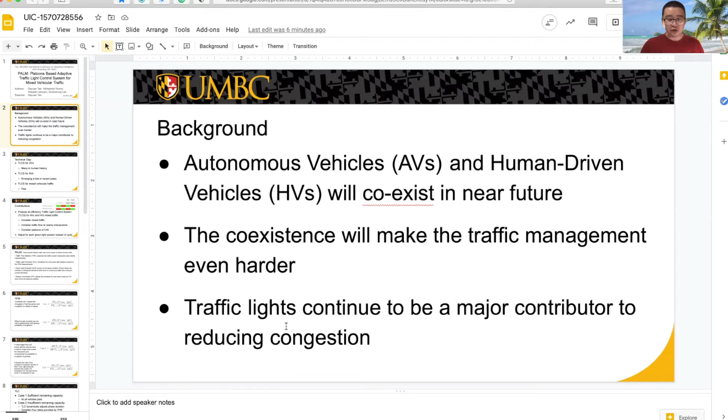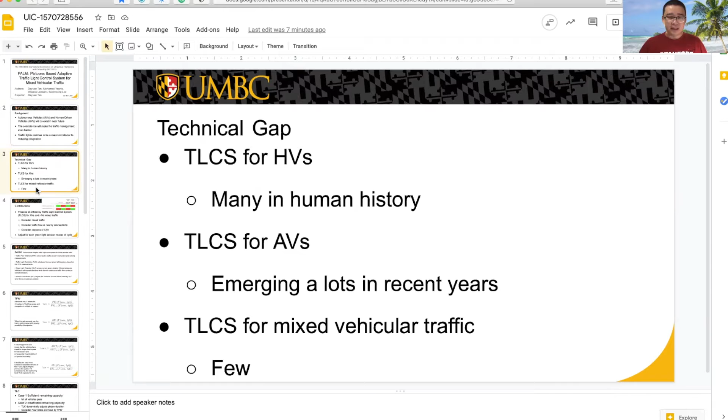Today, there are many traffic light control systems for human-driven vehicles. We deal with them every day. Meanwhile, in recent years, there are many newly proposed traffic light control systems, especially for autonomous vehicles. But how about traffic light control systems for mixed vehicular traffic? The number is few. That's the problem we want to solve in this paper.

So in this paper, we propose an efficient traffic light control system for AVs and HVs mixed traffic. We consider the mixed traffic, of course, and we consider the traffic flow not only at the current intersection, but also at nearby intersections, which can help us better understand the traffic flow, the global situation. In addition, we also consider the platoons of autonomous vehicles, especially connected autonomous vehicles.

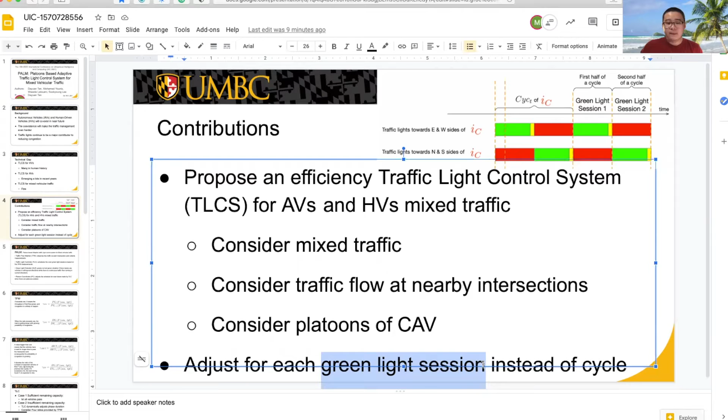What's more, we also propose the concept of green light session, which is a new concept. We adjust our traffic light schedule based on green light sessions instead of cycles, which is what researchers usually do. So we have one figure to help us understand green light session. The top one shows the traffic lights towards the east and west side of the intersection center. And the bottom one shows the traffic lights towards the north and south side of the intersection center.

And we call this one cycle. And this will be the second cycle. Usually what researchers do is at the end of the first cycle, they calculate, predict, and schedule their plan for the next cycle. But here, we don't do this. We propose the concept of green light session.

We call this the first green light session. It's actually the first half of a cycle. It includes the green light phase for the east and the west side. And we call this the second green light session, which is actually the second half of the cycle. It includes the green light duration for the north and south side.

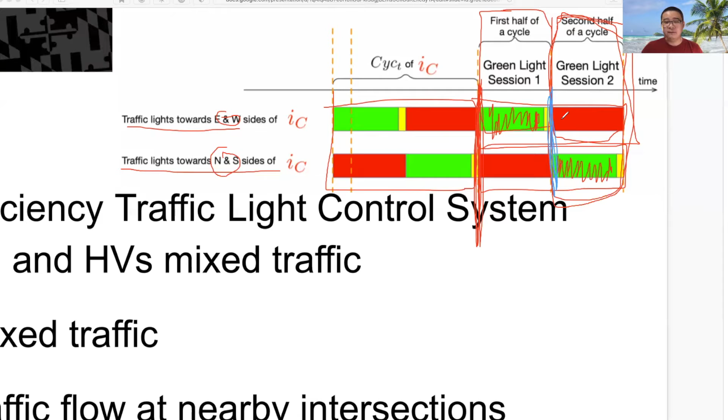So what we do is at the end of each green light session, instead of at the end of cycles, we calculate, predict, and then we schedule the next green light session, which helps us to adapt to the traffic flow faster and better. And then let's move on to our model, PALM. It's short for Platoon-based Adaptive Traffic Light Control System for mixed vehicular traffic.

It has 4 modules, actually. The first module is Traffic Flow Watcher, aka TFW. It observes the traffic at each intersection and collects measurements. The second module is Traffic Light Controller, TLC. It schedules the next green light sessions based on the traffic flow watcher measurement results.

The third one is Green Light Extender, aka GLE. It extends the current green duration if there are barely any vehicles in orthogonal directions, while there is continuous traffic flow coming in current directions. The last module is Platoon Coordinator, aka PC. It adjusts the schedule for the near future made by the traffic light controller when platoons exist.

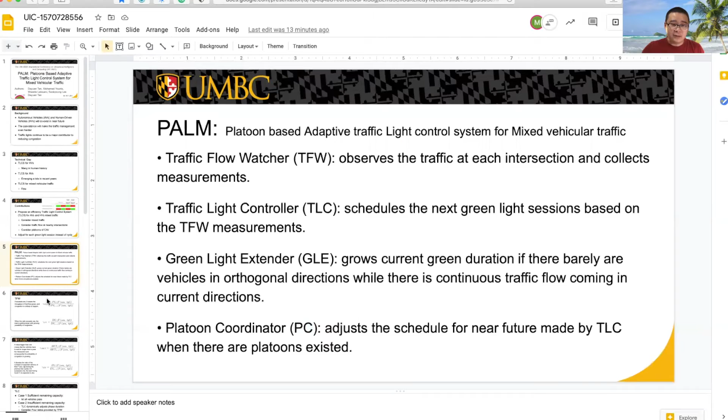And then let's dive into them one by one. So the first one is Traffic Flow Watcher. It actually observes some parameters. Most importantly, there are 4 parameters. The first one is PV. It stands for the number of passed vehicles.

So the first ratio is the ratio of number of passed vehicles at current cycle over previous cycle of each flow. If this ratio exceeds 1, it means the throughput of that flow grows. Then the congestion is unlikely to happen.

The second parameter is DV, which stands for number of delayed vehicles. So the ratio is the ratio of the number of delayed vehicles at current cycle over previous cycle of each flow. If this ratio exceeds 1, then that means the load is getting larger with growing possibility of congestions.

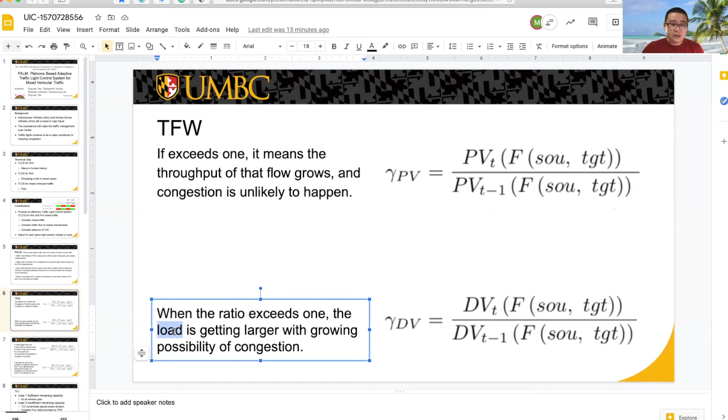The third one is AWT, which means average waiting time. So the third ratio is the ratio of average waiting time of current cycle over previous cycle of each flow. If this ratio is bigger than 1, that means the vehicles are waiting longer time. And that means the probability of congestion is growing.

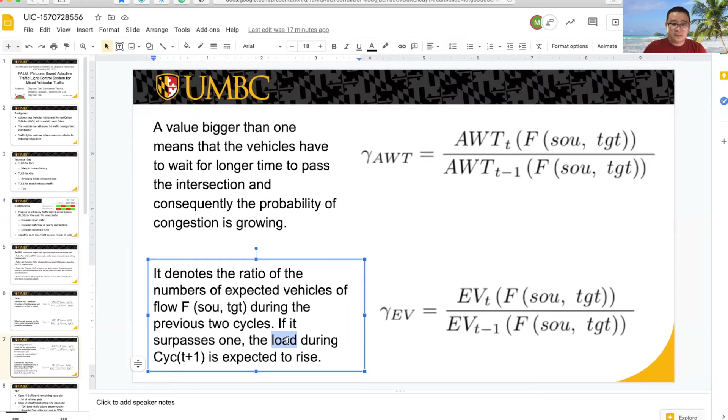The last parameter is EV, which stands for the number of expected vehicles, those vehicles who will come. So the last ratio is the ratio of number of expected vehicles of previous 2 cycles. If this ratio surpasses 1, that means the load in next cycle is expected to rise. More vehicles are coming. Then let's move on to second module, traffic light controller.

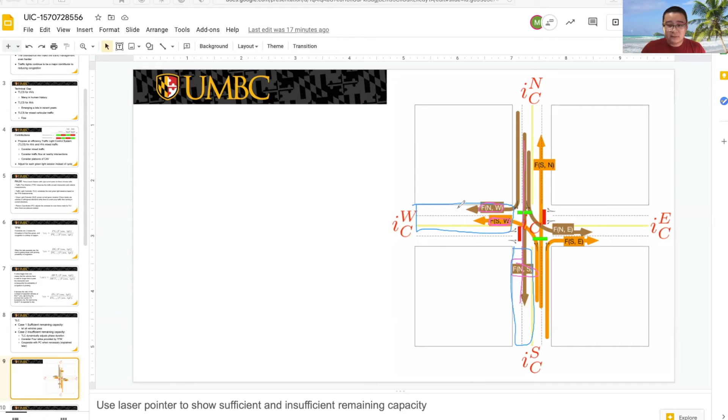Similarly, we can see the blue segment of this third segment. If the remaining capacity of this blue segment is bigger than the sum of flow from north to west and the flow from south to west, then we will just let the vehicles in these two flows pass the intersection and go into this blue segment. That's what we mean by sufficient remaining capacity.

But in case 2, when there is insufficient remaining capacity, the situation will be more complicated. What will we do? Our TLC, our traffic light control, will dynamically adjust phase duration, and it will consider 4 ratios provided by traffic flow watcher. It will also cooperate with PC, which is Platoon Coordinator, when necessary.

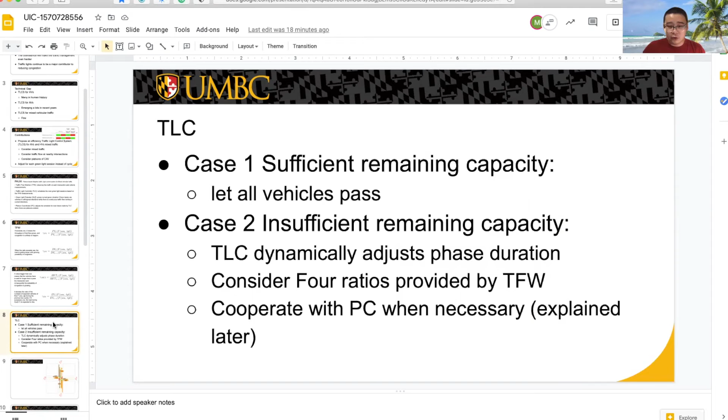Okay, and then let's look at this logic figure, which will help us to understand case 2 when there is insufficient remaining capacity. And also I want to mention that in this case 2, we have 4 subcases. The first step, we will check the ratio of number of passed vehicles. If this ratio is bigger than 1, that means more vehicles passed the intersection in current cycle than previous cycle. And it might be good news, but we will check out more details.

We check out the ratio of average waiting time. If this ratio is bigger than 1, that means we have more vehicles passing the intersection, and the vehicles' average waiting time is larger. That means the outgoing segment may be good, but the incoming segments might be congested. So we should care about the incoming segments.

And on top of that, we check out the ratio of number of delayed vehicles. If there are more delayed vehicles in this cycle than last cycle, that will be terrible. Let's combine them together. So we have more vehicles passed, vehicles waiting longer, and more vehicles delayed. That means the current green light duration is not long enough. We must do something. We must increase the green light duration.

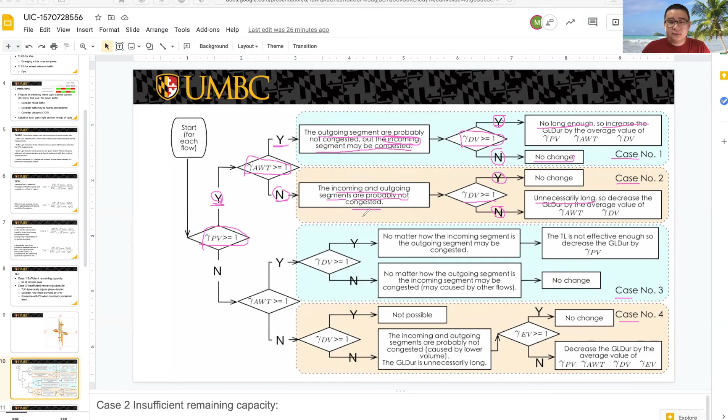Then we move to the green light extender. At the end of the current green light, if there are no vehicles in orthogonal directions within a certain proximity to the intersection, and meanwhile there is a continuous uninterrupted vehicle flow coming, then the GLE will extend the current green light.

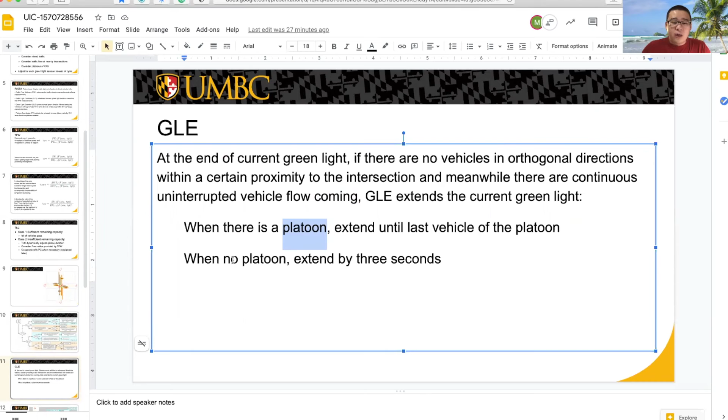And how long will it extend? When there is a platoon, we will extend until the last vehicle of this platoon passes the intersection. When there is no platoon, we just extend it by 3 seconds.

The next module is PC, the platoon coordinator. The principle of the PC is to favor longer platoons and try to keep them intact, because we know platoons always have better performance. Our traffic light control will generate a plan for the next green light session. If the initial plan doesn't cut any platoon, that will be wonderful, no action needed. Else, if the plan cuts some platoon, then we have to try to find the minimal platoon cuttings to adjust it.

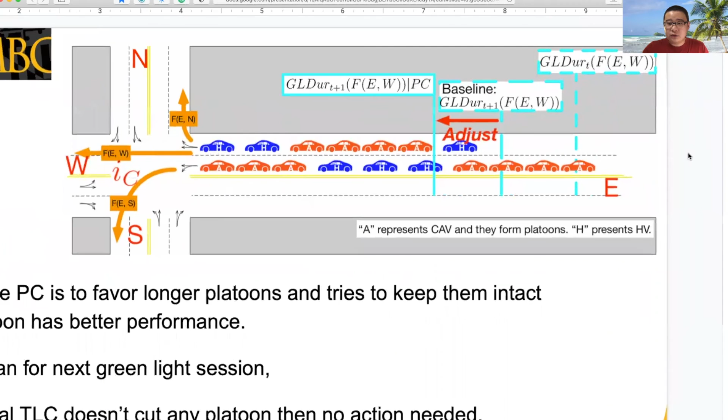We have this figure to help us explain. For this figure, we have an assumption that in this case, we want to shorten our green light duration for the next cycle, for the next green light session. Those blue vehicles with H are human-driven vehicles. Those red vehicles with A are autonomous vehicle platoons.

And this sky blue line means the green light duration at the current cycle if we don't change anything. And this sky blue line means the plan for the next green light duration generated by our traffic light control. But we can see it cuts one platoon. We try to avoid this.

So we adjust it a little bit to this sky blue line, which has minimum platoon cuttings. In this case, it cuts no platoon. And we will use this sky blue line, which has minimum platoon cutting, as the final plan for the green light duration in the next cycle.

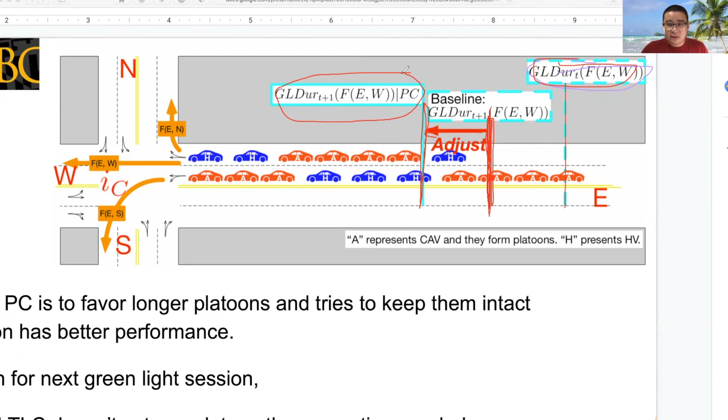And then we move on to the validation experiments. We compare three traffic light systems. The first is the static traffic light system, which has fixed duration for all phases. They don't change. The second one is the actuated traffic light system. What they do is exactly what our green light extender does, without considering platoons. And the third one is our PAM.